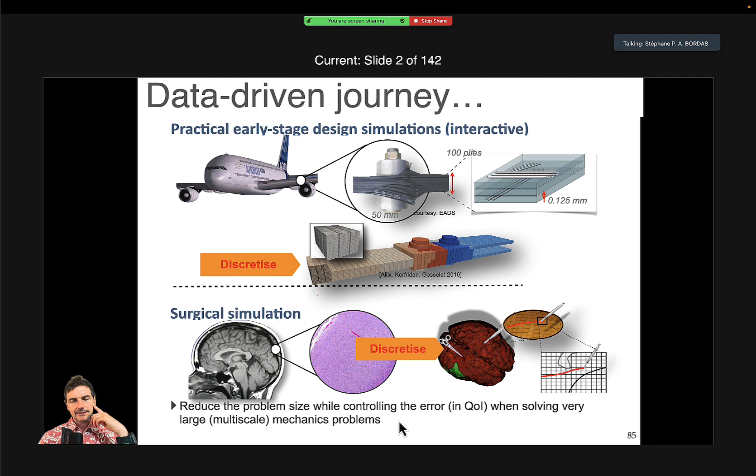I think it's very important not to be too shy and to try to take risks, especially early in your career. I could come back later to how to handle this in a practical way.

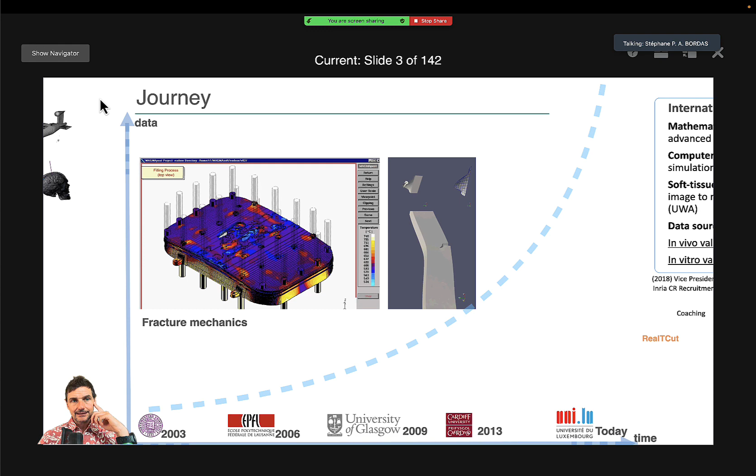So let's start with what happened during my PhD. I'd like to start from basics—it's always helpful to know where people come from. Here I've drawn a graph with time on the horizontal axis and data on the vertical axis, and this curve is an approximate representation of the amount of data versus time.

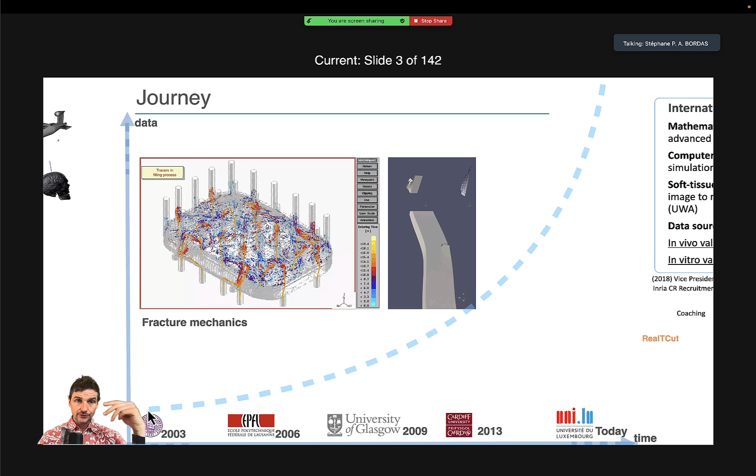At the beginning, during my PhD at Northwestern in 2003, we had to rely on models that were a priori written in stone. For example, we were working with Paris law, looking at the propagation of fractures in aerospace components made of aluminum. We looked at the literature, and of course Paris law is the most well-known approach to do that.

This is a semi-empirical law which essentially looks at observations and tries to decide what to do with them—what would be the rate of growth of the crack as a function of the number of cycles. This is exactly what you're interested in, because you'd like to know, between flight 1 and flight 10,000, how much the crack grew.

The vertical axis gives the speed at which cracks are growing, n is the number of cycles (flights), and dA is the increment in crack growth. On the x-axis you have the stress intensity factor, which you can compute using domain integrals—we can come back to that if you're interested. Basically what you do is compute the stress intensity factor; it's not easy, but conceptually simple.

And you then, based on the stress intensity factor, deduce the amount of crack growth, which is proportional to the number of cycles. So dA equals dN times delta K to some power. The power is again an empirical factor, and you have some sort of proportionality coefficient, which is again an empirical factor. So as you can see, you have a lot of data hidden in this Paris law, because people did thousands of experiments.

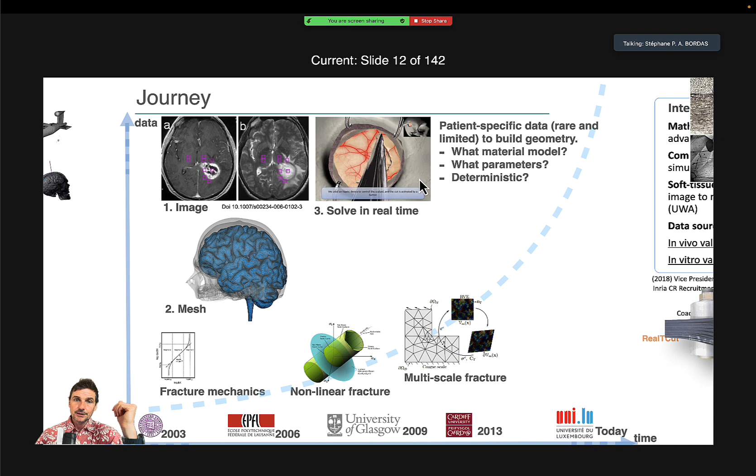This is where we went, because I remember clearly in 2006 when I wrote that first ERC grant, I said I will never look at constitutive models, I will never look at material models, because I don't want to know what the material is doing. This is not my field. There are experts like Ogden, Holzapfel and others, Gasser, who are really experts in modeling large deformations. I didn't want to work on that.

Recently, we completely changed this idea, because we realized that without working on the models, we would never be able to do anything patient-specific. So we said, okay, we will need to look at the models. Essentially, we went in the direction of Giuseppe Sciume, who pioneered work on porous material models for soft tissues. That was a big step in that direction, with Stéphane Urcun's PhD thesis.

So now the question is, what can we know about the material model? Because the big question is, as we said, all humans are different. So if they are different, how do we know what material model to use, and what material parameters to use? That was really the problem. Because we don't know that, we assumed a probability distribution for each of the important parameters. It's not very important to know which parameters at the moment—let's assume there are two, C1 and C2—and we have random fields.

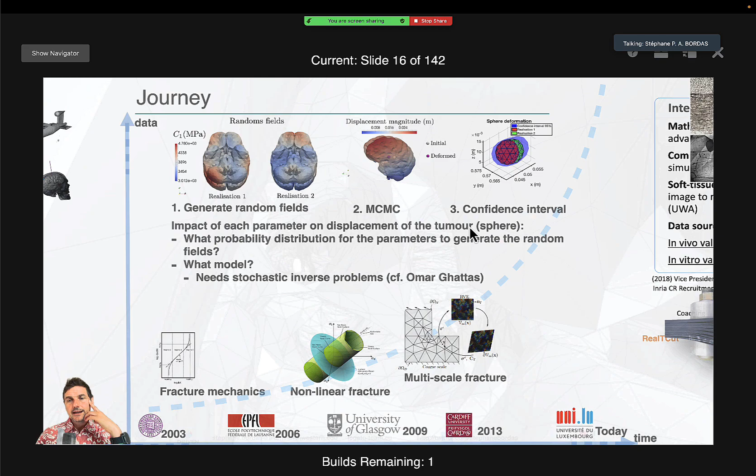The paper we submitted yesterday to PNAS is on unraveling the logic behind this microstructure, to know what were the characteristics of that microstructure that creates the energy absorption mechanism. I could present this paper at some other time if you're interested, it could easily take an hour because it's a very interesting problem.

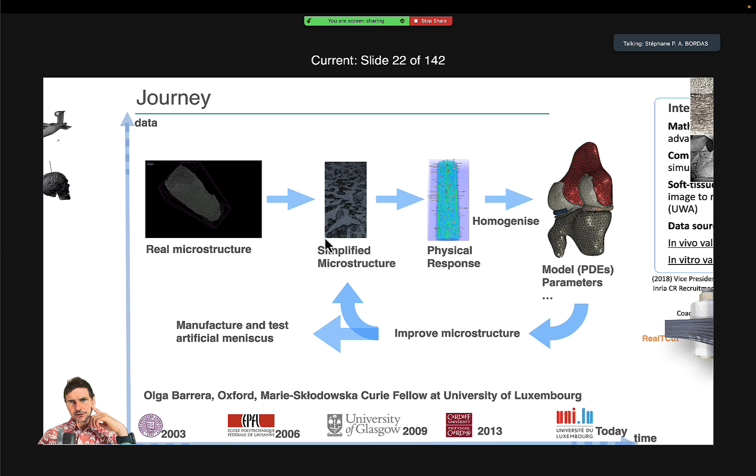And here comes the problem of data, of lacking data, because we, as you can imagine, do not have hundreds of samples of menisci. So we have one model. This is the model of the meniscus that we are working on. But it could be that at different points, the behavior is different, right?

So maybe here it's isotropic, here it's more in that direction, or here it's anisotropic in that direction, and so on. So depending where you are, you do not know for sure what the behavior is, because you don't have enough data on this particular meniscus. In fact, you have no data at all, because you never saw the meniscus before.

And so what you'd like to do is merge data from different menisci taken from different individuals, and then map this back to one specific model of the meniscus. I think that's quite a smart idea that we worked on, and it's working very well.

Okay, so then where are we going from there? We have now many projects that are essentially only data. So, I'm not talking about everything.

We have a very nice project with Jakub Lengiewicz and Alexandre Tkatchenko in physics on the quantum continuum coupling. We are looking at delamination using van der Waals interactions, proving that they are essential in figuring out the interactions between two layers of atoms, and that they see each other up to micrometers and not nanometers, as pairwise potentials would indicate. So if you're interested in this, we could also discuss it.

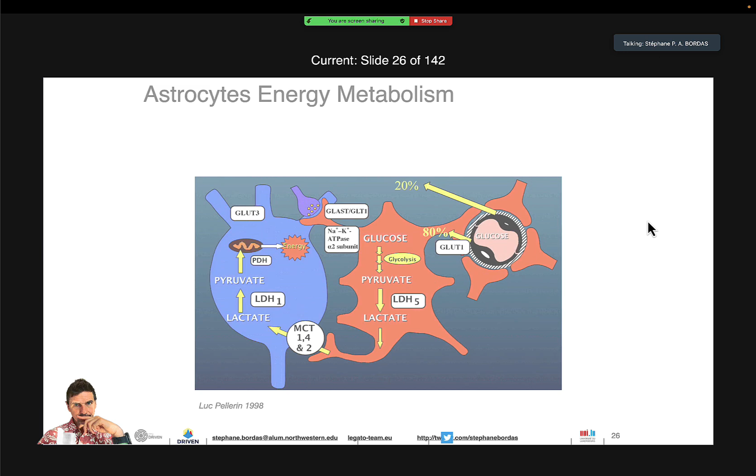Okay, so now that we've talked about the basics of where the data is, I want to give you a few hints about one particular example in the brain. This is something where we have data, but it's very difficult to access. This is data from an astrocyte in a mouse. An astrocyte is one of the glial cells around the neurons, and these cells are able to do a lot of things, which I'll come back to.

When you think about that, it's very difficult to model this. You would like to solve advection, diffusion, convection, reaction-diffusion in these astrocytes, but look at the complexity. We want to basically build a mesh of this - it's completely mind-boggling. So Sofia Farina came up with an approach using enriched finite elements, which I'll give more details about in a future lecture.

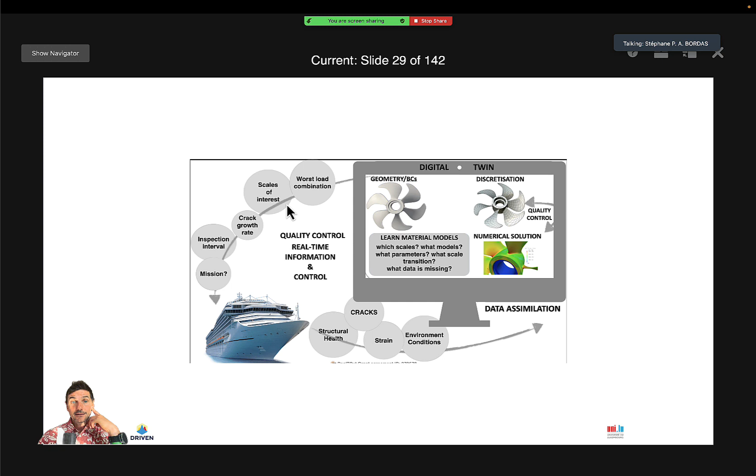Giving, for example, inspection interval. Should the ship go back to port? Should it keep sailing? What is the crack growth rate? What are the scales of interest? Because depending on loading, it could be that one scale is useful or the other scale is useful. What are the worst load combinations, and what are the best models that you can use to extract the parameters that you're interested in? So as you can see, there is a lot of information that can be gleaned.

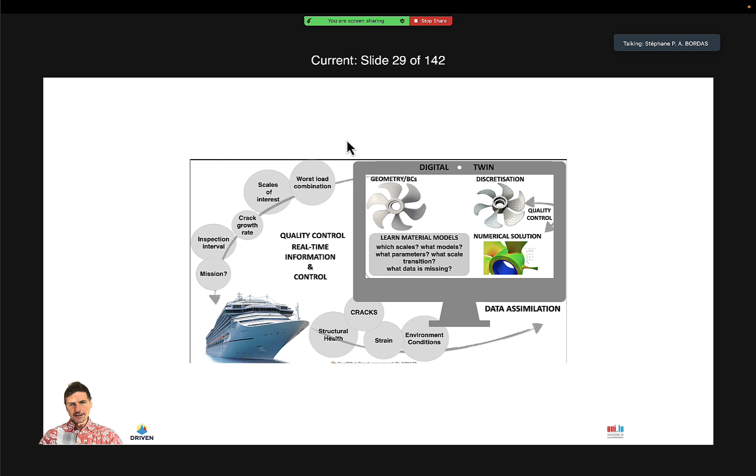And of course, there is no reason why we would not do that with actual human beings, because we do a lot of medical tests during our life. And it would be very helpful if we could actually use these medical tests and give informed information to maybe the medic, or maybe to have a virtual medic that would be actually able to make decisions and help you make better decisions on your health, on your food, on your sports activity, on your social connections, on what you eat, what you drink, and so on, and what your gut health is about, and your brain health, and your dopamine level, and so on. So you could basically imagine anything.

Of course, the devil is in the details, and there is a lot of work to be done for that to work. In particular, there is a problem of patient specificity, because all patients are different, but at the same time, you'd like to leverage information which is gathered through all the patients that you have. So you'd like to do some sort of updating of the information as you go. Okay, so that's basically where my whole group is going.

I will now summarize it briefly in a few slides, which I think are very nice in order to understand what's going on, what we are trying to do. So there are, first of all, quite a number of cases in computational science, and as I think I made the case for, traditionally we've been dealing with experiments done on samples that were gathered over tens of years, maybe hundreds of years, and tested. Now what's going on is a bit different, and this is what I want to show you here.

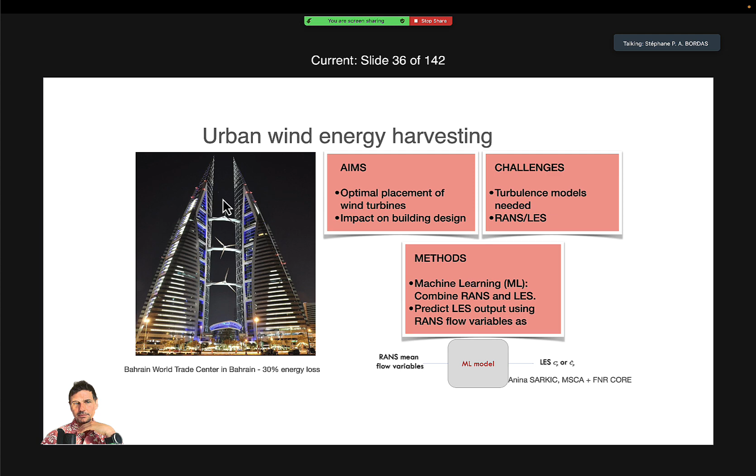A very simple example is urban wind energy harvesting. If you look at the Bahrain World Trade Center, they basically put 3 of these wind turbines there. The problem is it's wasting 30% of the power on a daily basis because of suboptimal positioning of the turbines. If they had put them in the other direction with the wind patterns, they would have made 30% more, apparently. I don't know this problem very well, but this is what it shows.

So it's a very nice direction. And the second one is trying to see what you can do with the usual methods.

Okay, that I will skip, but I will just tell you that this is something we could talk about at some point, very well known by Hussein Rappel, who would actually be a very good lecturer for that: essentially you're trying to update your knowledge about the world as you learn. I could give you an introduction on that as well if you're interested.

So you have prior knowledge about something, for example the parameters of the hyperelastic model of the brain, or the poromechanical model of the brain, or the meniscus. You have some prior knowledge, you say coefficient A1 looks like a statistical distribution like this. Then you have data coming in and other hypotheses that come in. Your idea then is to come up with a so-called posterior distribution.

So you have prior knowledge, you have data, they come into a Bayesian statistics module, and these hypotheses plus prior plus data give you an updated prior. This updated prior goes back to the prior knowledge and becomes the new prior. So now you have the feedback loop, and that gives you a new prior.

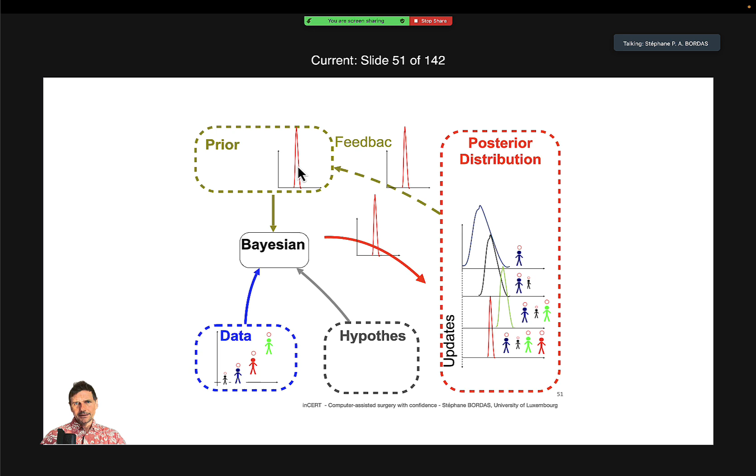And for model updating and model parameterization, this is a very powerful feature that you should know about. Okay, so well, this is basically what we just said.

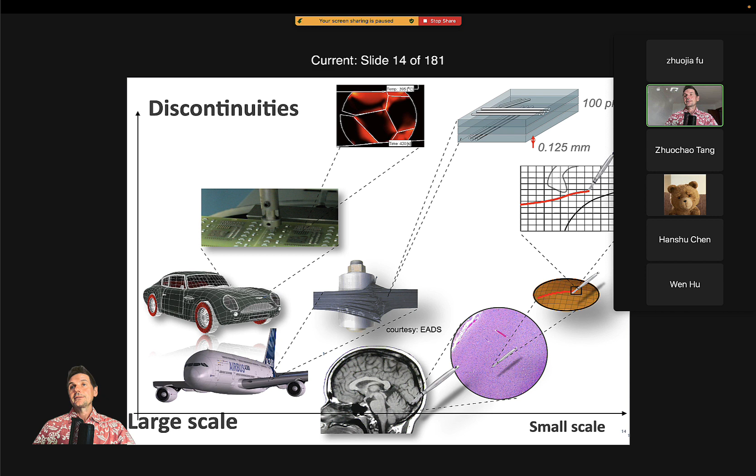Now if you cut through a brain tissue, you get a discontinuity which hopefully you don't need to mesh, because it's easier not to mesh - this is what we call free boundary problems. Again, going from legato, where you sing all the notes in a linked, smooth way, to staccato, at the small scale it sounds a bit like this, with little jumps and discontinuities between the words. That's a different way to see things.

So what we do basically - this is a very nice concerto which I really like, by Brahms - if you think about what we are doing, we are orchestrating the sound of materials. If you go lower, you see staccato; if you go higher, you see a very smooth thing. So if you listen to the material at the coarse scale, you hear something very smooth, but at the fine scale you hear very disrupted sounds with many jumps.

There are many examples: multi-phase problems, fracture of concrete, the problem of multiple bubbles being created, non-Newtonian fluids, and a dam break example. So lots and lots of different examples.

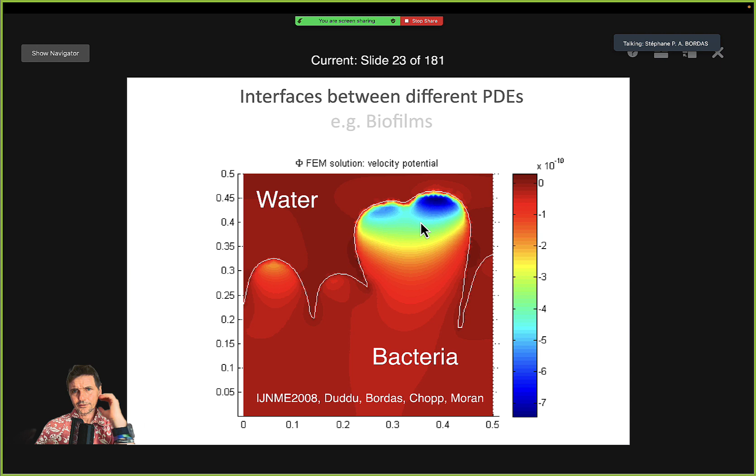And we have a weak discontinuity. Another example: the key point here is to figure out the growth of this biofilm. On the interface, you have a velocity potential with a gradient, and this gradient pushes the material outwards - this is the bacteria growing and pushing outward. Outside, in the water phase, we have a Laplace equation, and we have a Poisson equation in the bacteria phase.

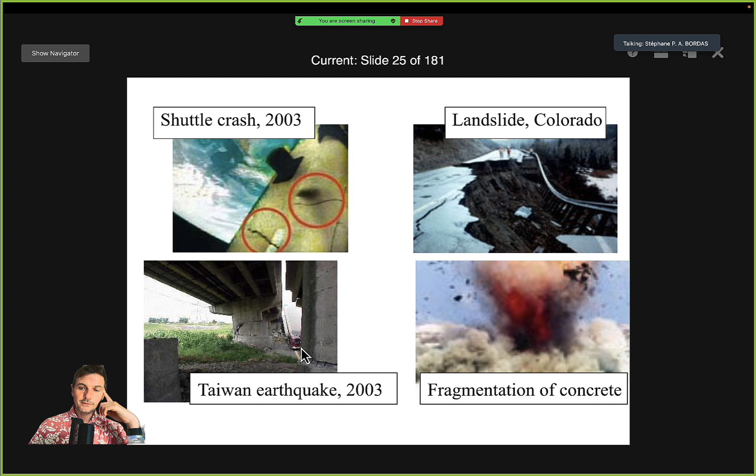So now the problem is, when do free boundary problems occur? Of course, fracture mechanics - Taiwan earthquake, fragmentation of concrete, landslides in Colorado, lots of examples of fracture, like the Comet aircraft, which became a convertible aircraft, but that was not foreseen. Problems of fracture in biomechanics, and so on. Fracture is really everywhere, and what I show today are simple examples of free boundary problems.

And of course the work of Xuan Peng, who did his PhD with me, and Elena Atroshchenko on propagation of cracks using isogeometric analysis with boundary elements, which is one of the best work that we've ever done, I think.

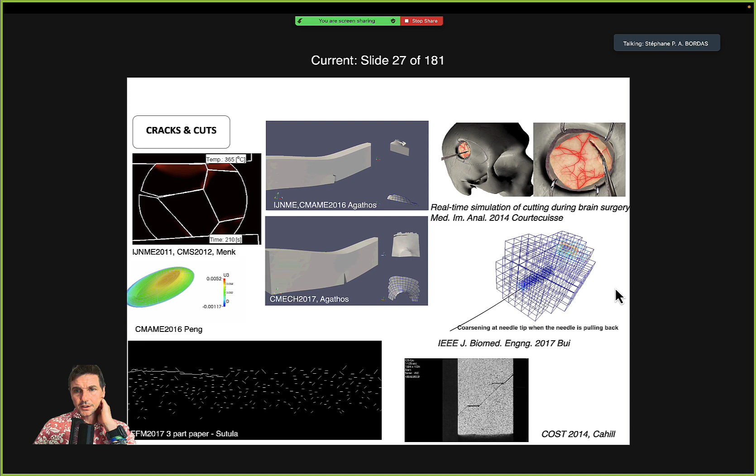Okay, so now, first example: cracks propagating inside a domain. You would like to figure out what exactly is going to happen, what is the most energetically favorable growth of crack that we can do in one increment. So you do a global minimization on all the crack tips, and try to compute which crack should grow. As you can see, it starts here, but then at some point, the most optimal crack is not here anymore - it starts to grow next to it, and so on.

It's a very complex problem to solve, and Dennis did that in very simple MATLAB code - well, not so simple, but very beautiful work that he did. Again, cutting in soft tissue that I've already talked about today.

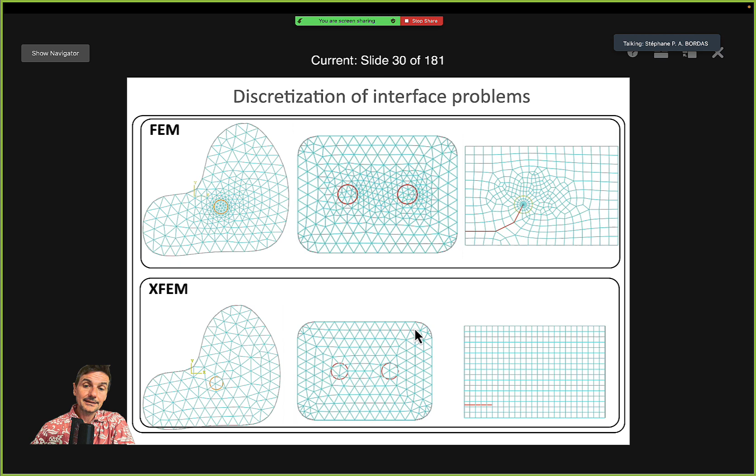That's why people came up with partition of unity methods. The book that we will release in October with Sundar at IIT Madras - what we see there is that the mesh is independent from the growth of the interfaces, because we can include discontinuities and singularities in the approximation field. That's been quite a big advance in the last century. So now there are really two approaches to handle interfaces.

The first approach is a coupled approach. What you want to do is couple the mesh with the geometry - that's step 1. The second approach is the opposite: decouple the mesh from the geometry. It's interesting because at the end of the day, these seem like two opposite approaches to solve the same types of problems. Practically, you might want to keep the same representation for the geometry and for the simulation, which would be something like isogeometric analysis.

On the other side, you want to decouple, so you have a mesh which is independent from the geometry. These two approaches seem totally opposite. So what we're going to try to address today is: what are the better approaches? Of course there's no general answer to that question, because if there was, there would be no research.

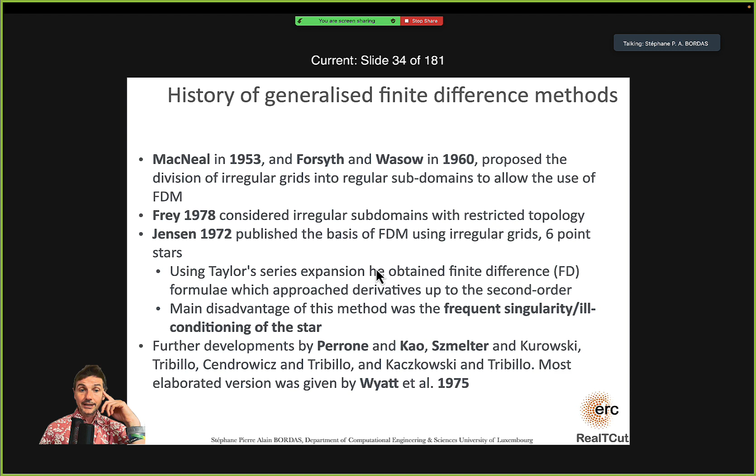You want to approximate the operator, different from finite elements where you approximate the unknown field - quite a different idea. In one case, finite differences, you approximate the operator; in the other, you approximate the unknown field. Very different problem, but at the end of the day it boils down to the same solution in one dimension - you get the same equations, but the approaches are totally opposite to each other originally.

The idea is how we can easily imagine calculating a derivative by looking right, looking left, taking the difference, and dividing by the length of the interval - that would be an approximation of the derivative. This is possible, but now imagine you're in 2 dimensions and the points are totally irregularly placed, maybe using a finite element mesh. Then how do you do it? This is called generalized finite differences, and there are papers that work on this. The question is how do you compute the operators - that's what we'll see in a few slides.

Now why really use strong form methods? Because these types of methods are known as strong form - you immediately and directly write the partial differential equation you're interested in at all the points in the domain you want to solve. So you say, I have Laplacian plus b equals 0 here. I compute the Laplacian locally, it gives me an operator, I put that on a row of the matrix. I compute b of u, put that on the right-hand side, and that gives me the operator I need. That's it - quite straightforward in general, at least for linear problems.

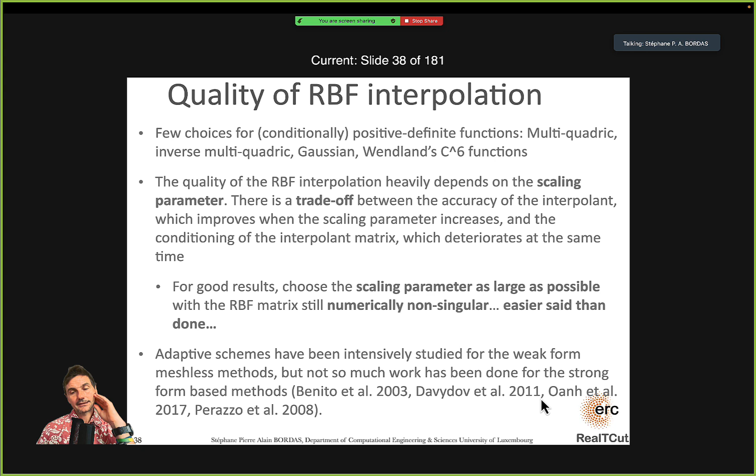And I highly recommend that you read the papers by Davydov, D-A-V-Y-D-O-V, because he is one of the world leaders in that area. And recently with Pratik Suchde from my team, they wrote a review paper on how to place the centers of collocation methods in general and how to optimize the point placement. And this review, I think, is outstanding, so I highly recommend it, as well as the work of my PhD student that I will show you later.

Okay, so what are collocation nodes? So we have collocation nodes are here. So, okay, that's one point, XC. You have a radius, RC, and you have a field point, XP, that are also known as particles. And the support is this area, or the volume, over which the point XC has an influence.

And so the question is, okay, what would you like to do? Well, you want to compute the derivatives at XC, which can allow you to reproduce the field values at each particle pi of the collocation node support. Okay, so basically you want to compute all the field derivatives here, which allow you to compute the values at points pi.

So what is a finite difference method? Well, that's what we said before. All we do is we write at xp, at any point, right, that is here, we write the value as the value at xc plus some corrections that come from Taylor series expansion. What else can we do?

I mean, it's the very logical thing to do. If you assume the solution is smooth, very important point, then you can do that very easily, and there will be some convergence radius of the Taylor series expansion and so on. So you know that you will eventually converge if the solution is smooth, and only if it's smooth.

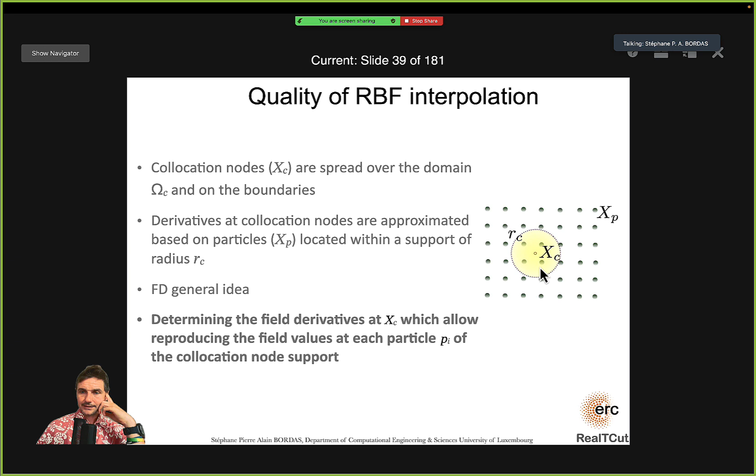Now what we can do is for a support composed of 5 particles, so remember what the particles are, they are here, so let's say 1, 2, 3, 4, 5. We have 5 particles in the support. We can write 5 equations.

XC, C is the center, it's the collocation point that you're interested in, so you just write the Taylor series expansion for each and every derivative that you're interested in. So then if you do that, you write this times this, plus that times that, plus this times that, and so on, will be equal to f of x p1 minus f of xc.

So what you essentially do is for each of the points, p1, p2, p3, p4, p5, you write the Taylor series expansion, which gives you f of x p1 equals f of xc plus the corrections due to the derivatives, and you do likewise for all the other points.

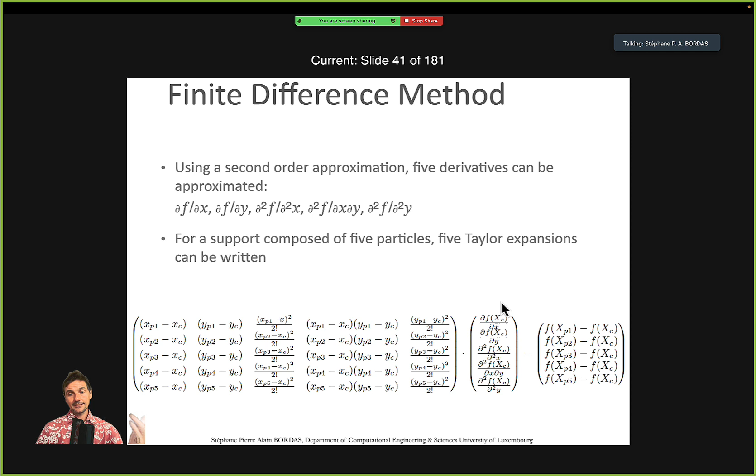So now you can see that if you have 5 particles, you can write 5 Taylor series expansions, and therefore you can hope to find 5 values for these derivatives, because that's what you're looking for. After all, what your question is here is what is the derivative of function f at point xc, with respect to x, then with respect to y, with respect to x twice, and then x and y, and y twice. And so that way you have an approximation of this.

So this is what you do. You put that in matrix form. You invert the matrix. You hope that it's invertible. Of course, that would be hopeful. And that's what you get.

So now the problem is that in the previous case we had exactly 5 derivatives and exactly 5 points, but that will never happen. Usually you will have cases where you either have too few points, in which case you can't do anything, or too many points, in which case you can do something, but the system is overdetermined. And of course you cannot solve it exactly, but you can solve it in the least squares sense, which essentially boils down to doing it this way.

So now what you do is you have a least squares functional that you're writing, and you try to minimize that with respect to the parameters. Okay, so far so good. That's the very usual way of doing things.

Now there is a second approach which is maybe unfortunately not very well known, known as the discretization corrected particle strength exchange. I have to say that the first time I heard this, I thought that was a mouthful, because it's quite complex to even read, needless to say, to understand, but there is a lot in that method, and I will try to tell you a bit about it, because I'm almost sure that you probably didn't hear about it. And if you like, I can also give you the papers, because I think they are quite useful.

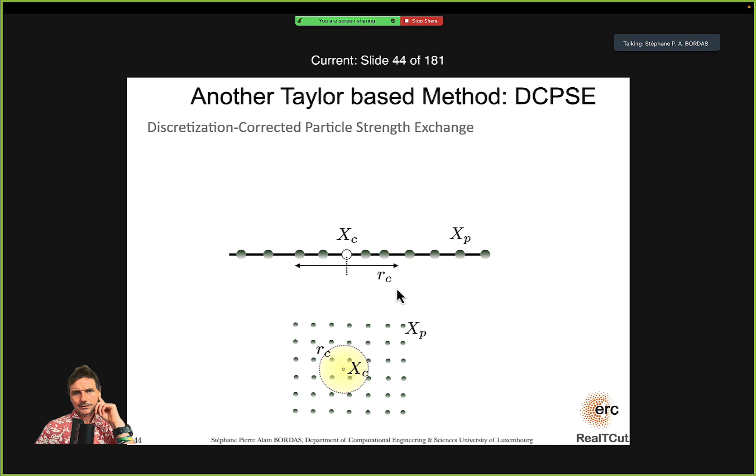So let me start from the beginning. So what we do here is exactly the same as before. So we try to identify the value of the derivatives at a point xc. So it would be like that one.

We try to get the fh, the x. We try to get, of course, the value of the function, the first derivative with respect to x, with respect to y, partial x partial x, partial x partial y, and partial y partial y.

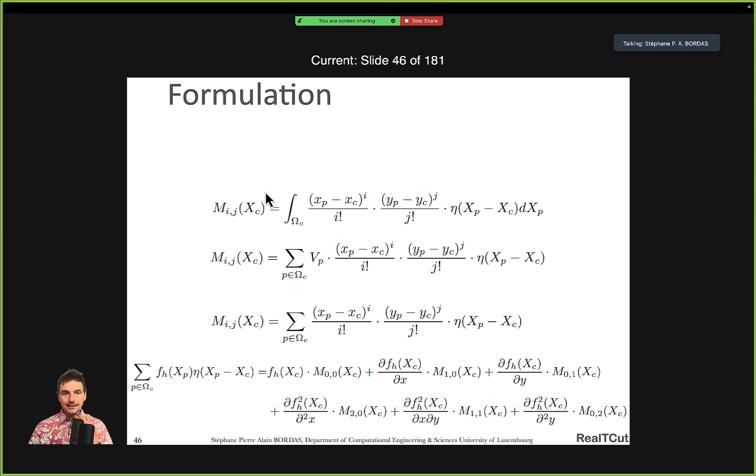Okay, so now what we do is we write it as some sort of integral, instead of writing it as a simple sum. So then we end up with some sort of moment matrix, Mij, and that moment matrix we use directly in order to identify or compute the coefficients that we need. So basically we did exactly the same as before, except that we are now correcting with an integral value. So this is the basic idea.

And on that topic, I recommend that you look at the work of Ivo Sbalzarini at Max Planck Institute in Dresden, because he is one of the world leaders in that area. He came up with the idea with his PhD supervisor, and he's really an excellent guy.

Okay, so once we have selected the appropriate function, because basically we have a smoothing function, which is this kernel here, we can apply the desired derivative, and we just set all the moments to 0 except the one that we are interested in, which we set to 1, and we do that alternatively.

So first we set the first moment to 1 and the others to 0, and then we set the first to 0, the second to 1, and all the others to 0, and so on. And that gives us essentially a set of equations which we can solve.

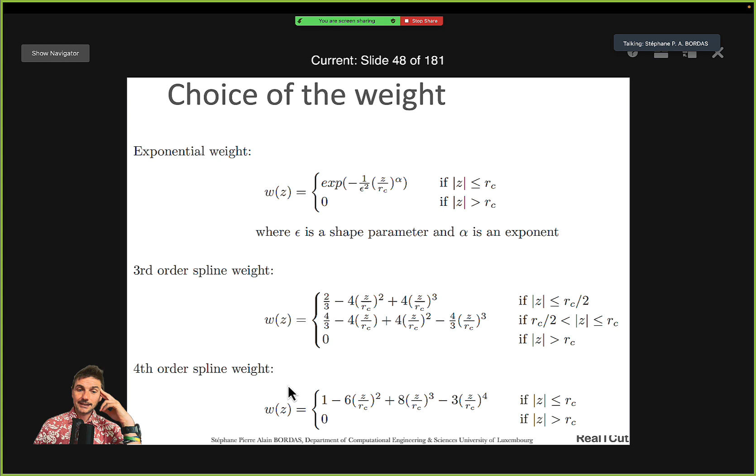But first we need to have a weight. So again, like in mesh-free methods, we have exponential weights, third-order spline weights, or fourth-order spline weights. We can use different things, and of course they all have their own advantages and drawbacks, which I identified in the papers as well.

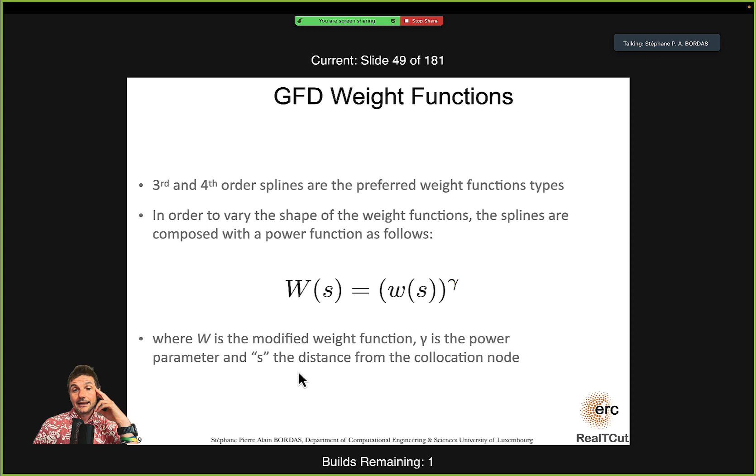Now we are going to look at a few problems using this discretization-corrected particle strength exchange. What we have managed to do is to have an adaptive point collocation method. This adaptivity allows us to optimize the point placement based on an error indicator, similar to what I was telling you about the surgical simulator, where we were trying to identify the best mesh for the system. We would like to have the optimal point distribution in that case. I'm really encouraging you to look at the papers I will give you, because they will allow you to understand better the way we do it practically.

The first thing we remark by solving the problem - here we're solving a very simple linear elastic problem with internal pressure in a sphere - we're computing the stresses, and we're doing that on a code which is parallel, and that's also available if you're interested.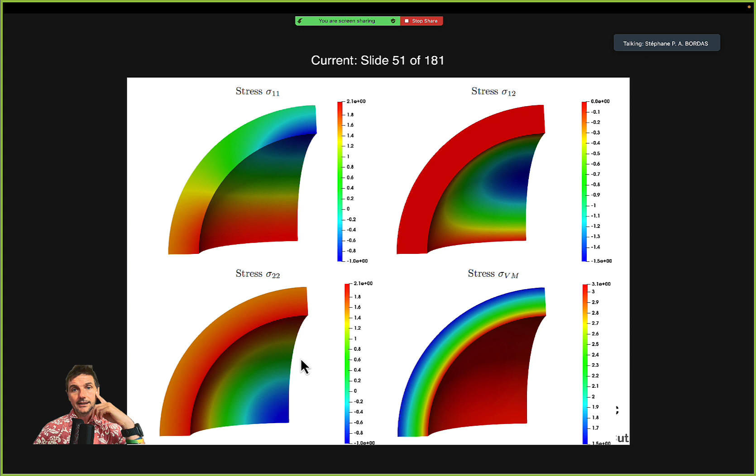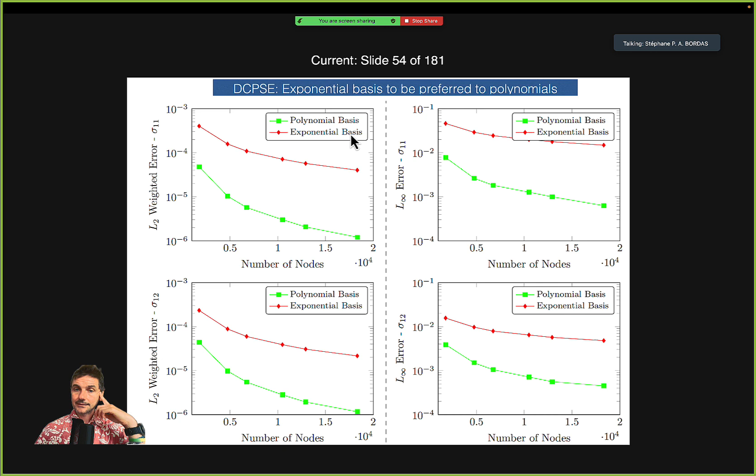Again, if we compare polynomial basis to exponential basis, what we see is that we have much better results with the polynomial basis, up to one order of magnitude less, even two orders of magnitude less error, which is great. So it's basically the opposite - polynomial basis better than the exponential basis. We still don't know why, but that's what we see.

Now, if we look at the support size on the boundary, because this is a very important question - what happens close to the boundary? In mesh-free methods in general, a lot of people are avoiding the problem. But even in Galerkin mesh methods, you have this support that intersects the boundary, and when that happens, you lose the Kronecker delta property on the boundary, because you basically do not have a zero test function on the boundary anymore. So this is something that we need to take into account.

Okay, so now what can we do with that? Let's look both at the Voronoi diagram GFD, generalized finite differences, where the points are distributed using a Voronoi diagram, which is a very well-known approach, dual to Delaunay triangulation, tessellation.

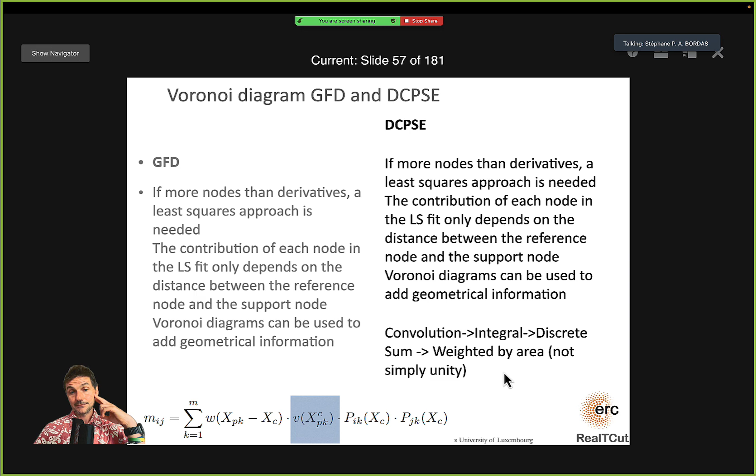If you have more nodes than derivatives, you need a least squares approach, and the contribution of each node in the fit only depends on the distance between the reference node and the support node. The Voronoi diagram can be used to add geometrical information. In DCPSE, if more nodes than derivatives, there is also a least squares approach, and the contribution of each node in the LS fit only depends on the distance between the reference node and the support node, and the Voronoi diagram can be used. But we use a convolution, an integral, discrete sum, weighted by area, and not simply unity. So this is what DCPSE changes.

Let's look at how it looks. This is a Voronoi diagram, reference node and support node. So if we use a Voronoi weight as opposed to a simple weight, we see that there is almost no difference.

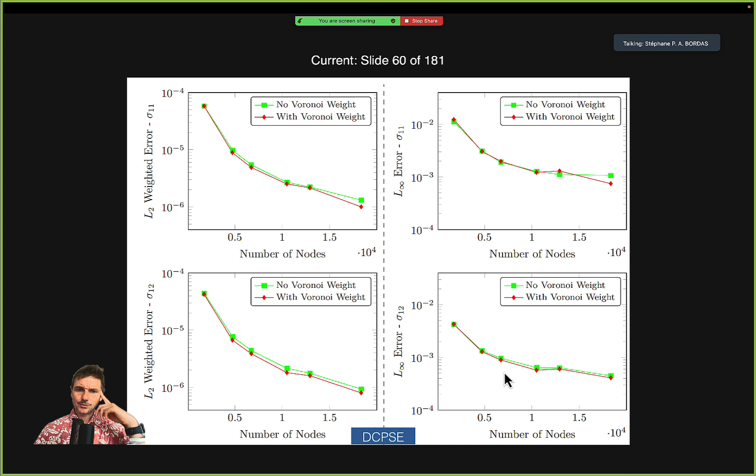So this is reassuring, which means that there is probably no need to be doing these changes. Okay, and now those are the results with mesh convergence, which is a hard topic because there is no proof of convergence for such methods, so we can only hope to get things as beautiful as finite elements.

Let's look at efficiency. So we have different methods here, and we try to look at the convergence rate in terms of the L2 weighted average. And the convergence rate actually is not that bad, because it's actually close to what we would expect in finite elements, which would be 2.

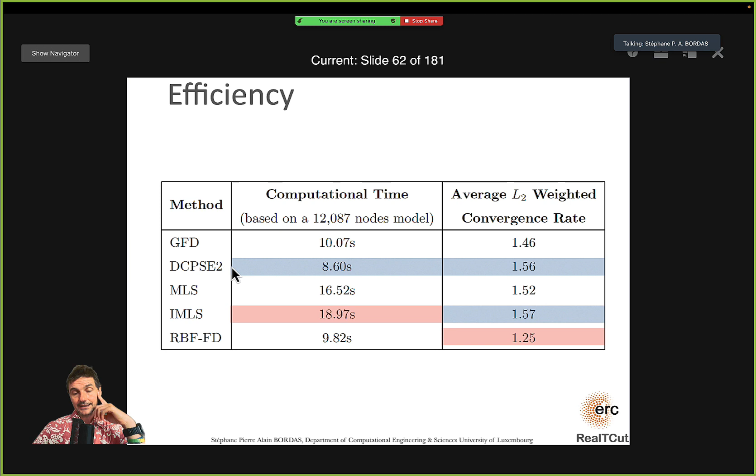Here, for that problem at least, you see that in terms of the time to compute, there are different methods that we tested: interpolation, MLS, RBF, FD, DCPSE2, and GFD. What we see is that clearly the convergence rate that we get, which is one of the best, is DCPSE2, and we get a computational time which is significantly less than IMLS, which is actually half. It's better than generalized finite differences, so clearly it seems like DCPSE is the method to choose.

So let's look at some conclusions. First of all, we need a sufficiently large support, but also not too large a support, because otherwise we end up with a huge bandwidth, and this is not stable. This is also time consuming in terms of memory. What we see is that we need 11 to 15 nodes for 2D problems and 37 to 45 nodes for 3D cases. We need a large number of nodes to get a proper simulation.

Okay, and what does it mean in practice? So if we look at this flange here, we assume there is uniform pressure loading here, displacement constraints there, here, and there. Now the question is, what is the deformation of this? Again, we started directly from a CAD file, so from NURBS.

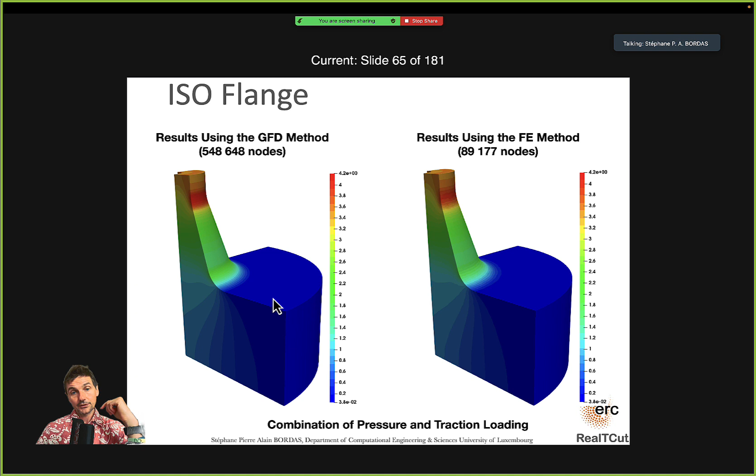This was discretized using three approaches. One was an STL file, which is basically a triangulation of the surface, and the other was simply putting collocation points along the splines, using the splines directly without any mesh. I think that's also very nice. The third was to embed the whole flange into a regular lattice of points, so that we don't even need to know where the points are. We just then add the points on the boundary as needed. I will talk about it a bit later.

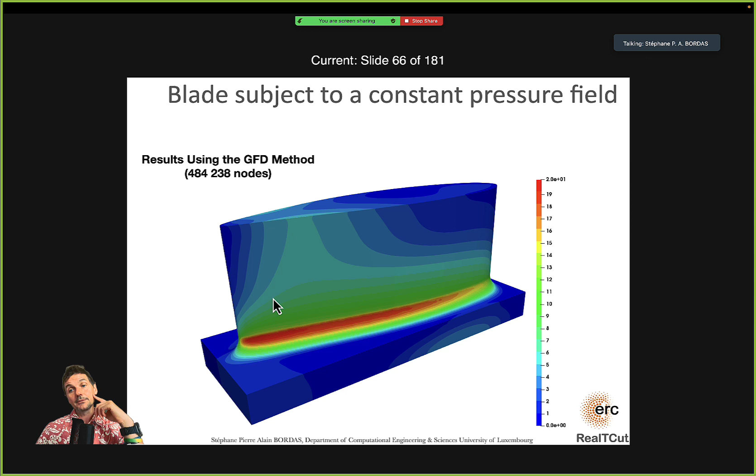Okay, so now we look at the results using generalized finite differences, and they look like that, with a very nice stress concentration. And now I'm telling you what we are working on, although now most of the results are in the recently published papers that I was mentioning.

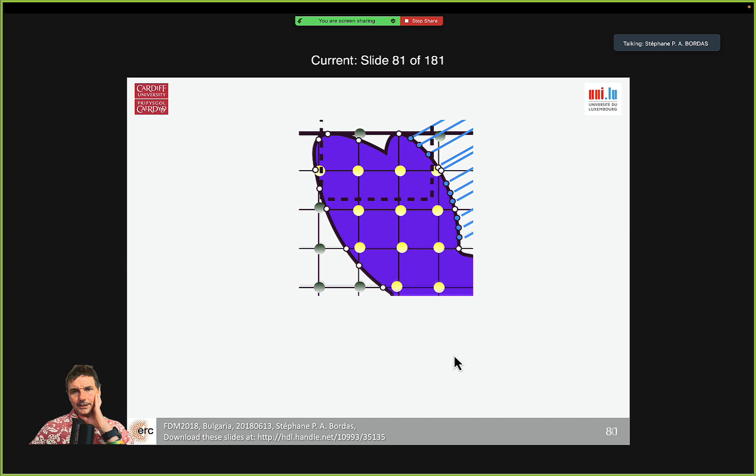So what you, of course, can do in these problematic regions is zoom in. Once you have zoomed in that region, you will simply add points at the interfaces, at the intersection between the geometry and the mesh. That's it, basically. Then that will allow you to have a better description of the boundary. And we do that in a semi-automatic way, let's say. Same here, we will have to add some points which will allow us to take care of the boundary.

Now, of course, we are not able to handle a kink, because that will create stress concentrations, and we can expect that we need some more points here. And again, the paper by Pratik Suchde and Oleg Davydov is talking about this very nicely.

There are some references, in particular from Davydov and Oanh and others, that are very useful, and some by Benito on how to compute DCPSE. I can give you those references as well as the presentations if you're interested. I think it's worthwhile reading this, in particular the paper with Oanh and Davydov, because that will give you quite a number of ideas.

So what we do is, from an STL file, we embed the STL file inside the domain. We cut everything that's outside, and we look at the convergence. We look at energy, Cartesian, symmetric, and so on, all the different convergence rates, and essentially the result is that the convergence is in the L2 norm of slope 1.

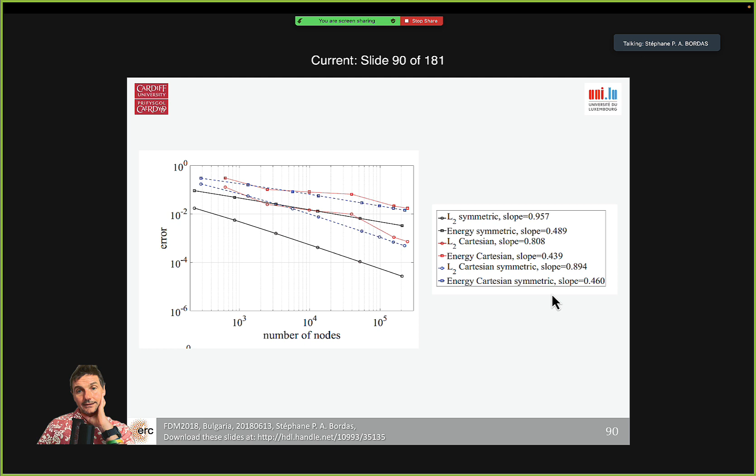You would expect 2 in the L2 norm, and you get 1. As you would expect 2 in finite elements, here you get 1. This is something you need to take into account. Again, if we use different approaches, we see the convergence rate on that curve.

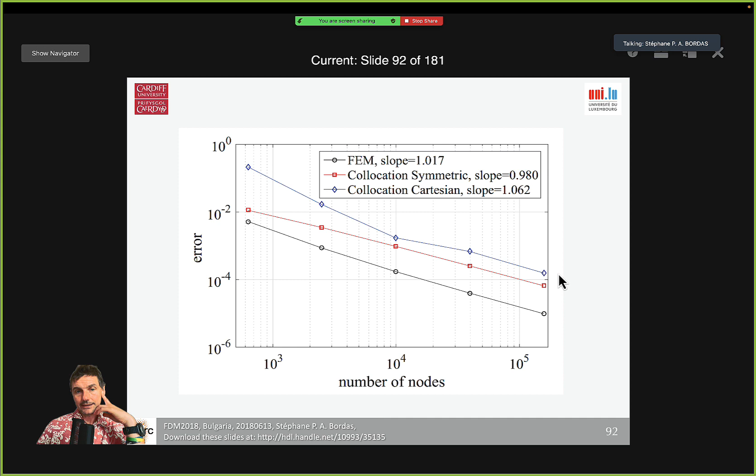In terms of number of nodes, we can compete with finite elements. You see finite elements here, collocation here. In fact, the slope is a bit smaller, but not much. And for the Cartesian case, we get a higher error, but the slope is approximately the same too.

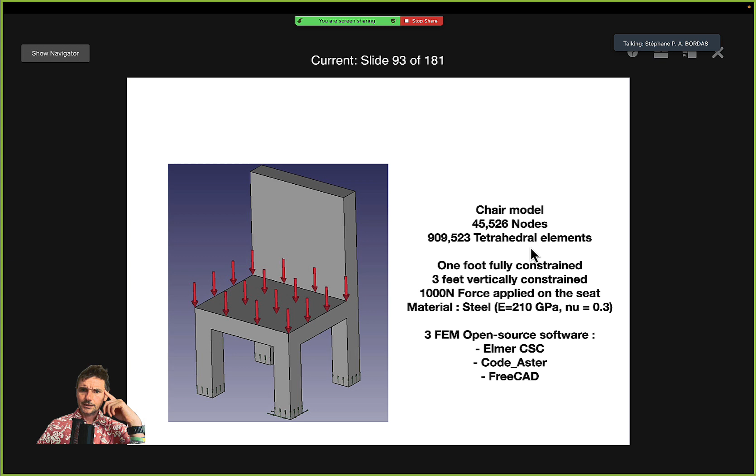Then we dealt with these very nice problems of a chair. Again, this is done with open source codes like Elmer, Code_Aster, and FreeCAD. We have different materials here, different nodes and tetrahedral elements and so on. So it looks like that. You have about 1 million elements.

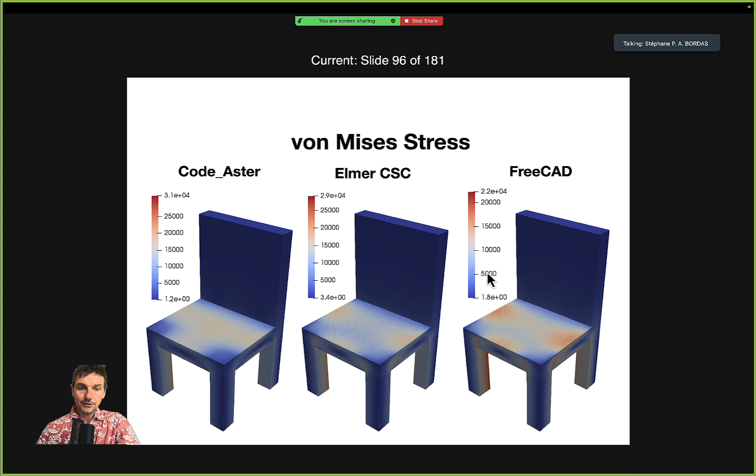And we are comparing all three solutions between what we're doing and the different solutions. If you look at the cut view of the distribution on the seat, you see there is barely any difference. If you compute the von Mises stresses, you see there is quite a good distribution. And finally you see this.

I think adaptivity—in fact I will show you the paper later if you're interested—but essentially adaptivity will allow you to optimize the mesh and the point placement given an error level. And again, here we always assume that we do know that the problem we are solving is the right problem.

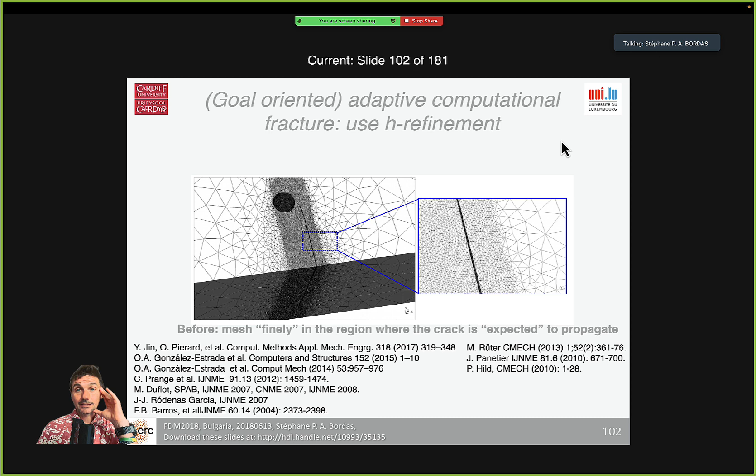We're not asking the question, is it the right problem? We're just saying, this is the right problem. Are we solving it right? Are we solving it precisely enough? That's really our main challenge. So how do we deal with error estimation?

I will come back to that at some other time this week. I just want to tell you for now that we have worked on this with a research center called Cenaero, and they have implemented it in their commercial version for 3D fracture mechanics. You see how a crack can propagate, and it's actually decimating the number of points, so we have far fewer points for the same error.

Because what we were interested in here was to minimize the error on the stress intensity factors. The stress intensity factor is, if you remember from Paris law, the governing point with which you are solving the propagation of cracks. So if the stress intensity factor is inaccurate, then what you get is an inaccurate propagation growth. It's very important to have proper stress intensity factors.

So now, how do we deal with that? If you look at the number of elements close to the crack front, you see that it's quite dense, and you would not like to have such a dense mesh everywhere, because that would be totally unfeasible. So that's what we did.

Similar for surgical simulation—you want to insert a needle in a brain, or in a liver, wherever. You have localization here clearly. You have high stresses, shear stresses and shear strains until the needle penetrates the organ and reaches the target.

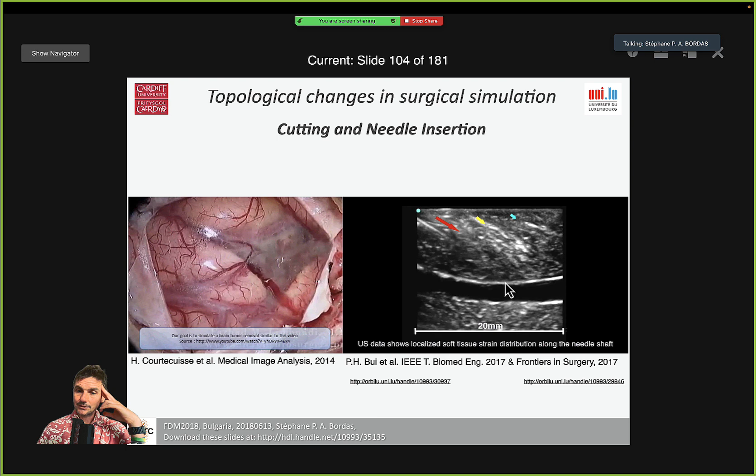So what we did is we developed a real-time error estimate, able to compute in real time the approximation error, meaning the ability of the numerical simulation to capture the exact solution, which we don't know. This is a bit of a mathematical miracle: without knowing the exact solution, we're still able to give an approximation of what the error is. This is something quite amazing.

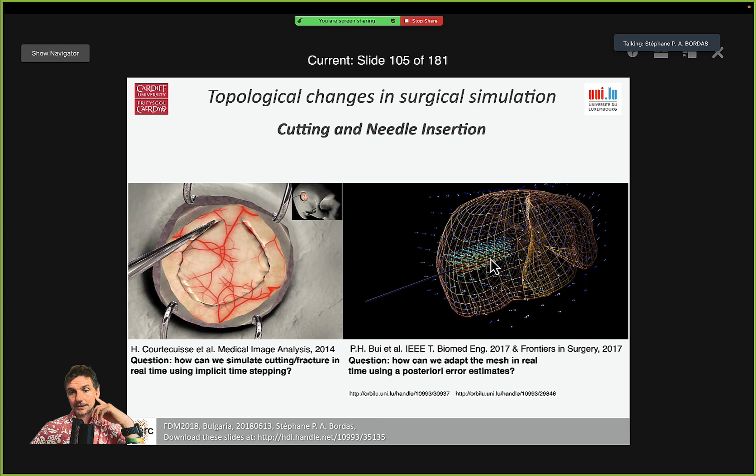So we insert the needle in this virtual liver. This is work by Bui-Phuoc. You see the needle is inserted, the mesh is refined, and as we retract the needle, the mesh is then unrefined, because the stresses are not varying that much anymore.

So we insert the needle, puncture, and the elements are refined along the needle path according to an error estimate. It is not random refinement, as you can see also here with the boundary conditions. There is some local refinement because of error levels. Then we retract the needle and the mesh comes back to its original

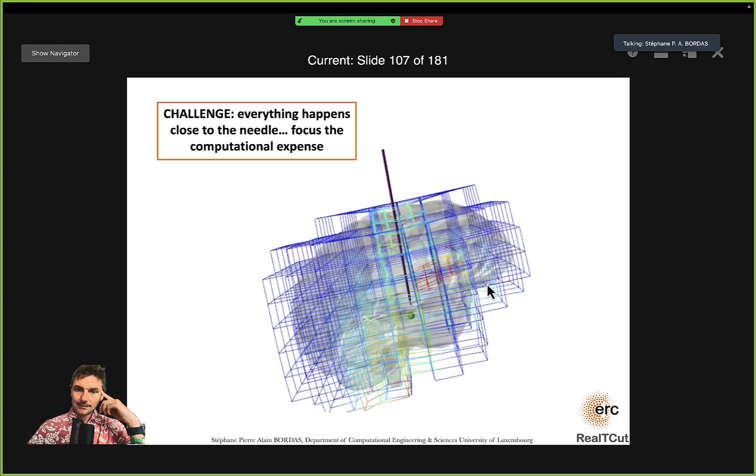density. Okay, so that's how it looks if you insert in a brain the cannula, which is used to insert an electrode and reach a target to stimulate with an electric current pulse the target for Parkinson's, let's say, not treatment, but alleviation of difficulties.

And so yeah, that's it. And now I will show you the list of papers that we published on that topic so that you can

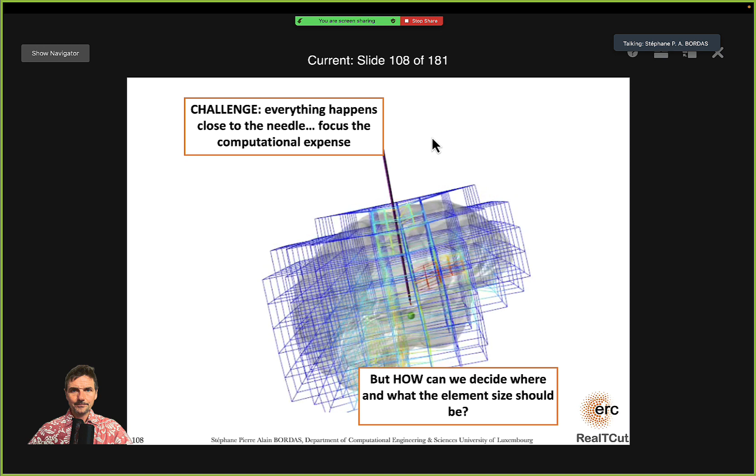take a better look. And I think I will end with some basics about the material point method, because I think it would be more suitable. And then in the coming days, I will be able to tell you more about the topics that we talked about today, which are, in my opinion, quite important. And of course, in the meantime, feel free to tell me what you would like to talk about, and I will do my best to make it happen.

Okay, so this work is mainly mesh-free work. I've introduced you a bit about mesh-free methods. We have talked mainly about point collocation methods, but you can also think about mesh-free methods as Galerkin methods. I think one of the very well-explained topics in that area is by Atluri, who unfortunately passed away. But we have basically the MLPG method, so Meshless Local Petrov-Galerkin. MLPG is a really nice way to think about all mesh-free methods. And if you like, I can also give you a categorization of all these methods, because they can all be formulated within one overarching framework.

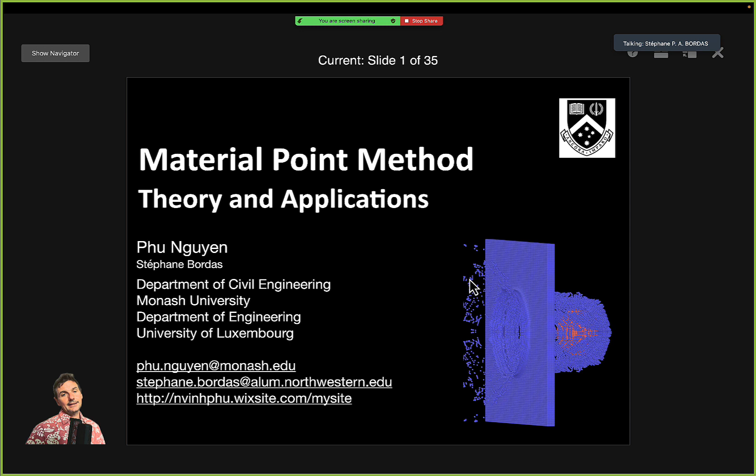So the material point method, this is work done mainly by Nguyen Vinh Phu, who is at Monash University. We wrote together this book on the material point method with Alban de Vaucorbeil, a colleague of Phu. I just want to motivate a bit what these methods are able to do, because what's really quite interesting is that they are quite related to what we used for the meniscus problem that I showed you earlier today.

So Alban is the guy that I was telling you about, who worked with Phu. He's at Deakin University, which is in Melbourne. And Tushar Mandal, who was a PhD candidate with Phu. This was funded by the Australian government and the Australian Research Council for Phu.

Okay, so what you see here is deformation, fracture of solids. So this is a totally different type of problem than what we've talked about until now, in the sense that you have very large deformations and fragmentation. So it's not really a problem—large deformation is usually quite tractable, but certain problems are

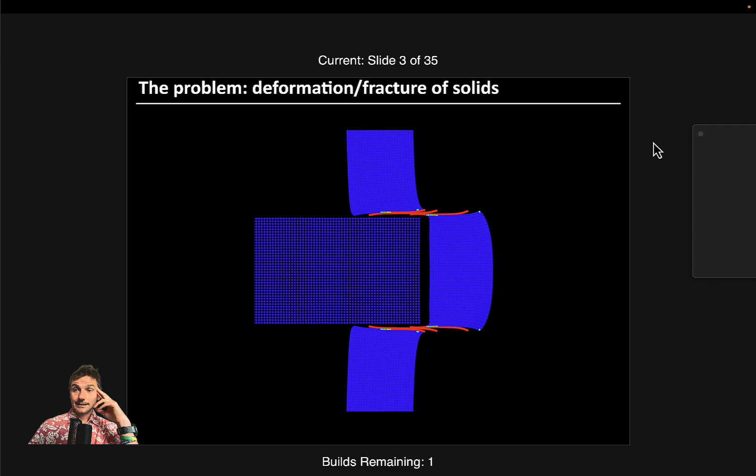Okay, certain problems with fragmentation are much more tedious to address than problems related to large deformations, because fragmentation means that you have several subcomponents of the solid, and this is something which can cause quite a lot of issues.

Okay, so for example, if you imagine this cube that enters this other cube, this is, for example, a bullet entering a domain or a piece of armor, then you can see that this region is extremely stiff and that one here is much more soft. And the question is, what would be the number of fragments that you end up with? What would be the energy absorbed? Or what would be the velocity of the outgoing component? So that piece that is being thrown out. And that's important for obvious reasons in terms of engineering.

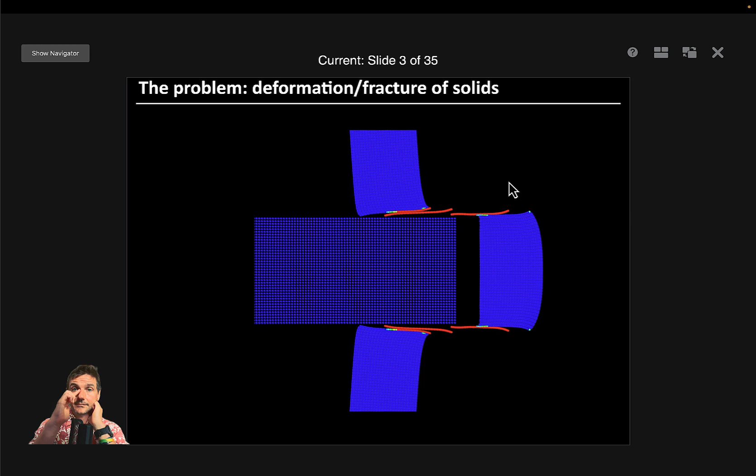And so if you were to solve that using finite elements, the problem would be really quite intractable. And I'm saying this because the idea of mesh-free methods dates back to Monaghan. So I hope you still hear me because there were some issues. So the problem of mesh-free methods clearly dates back to Monaghan, 1975-76, and originally that was really the SPH method.

So if you look historically, you start from smoothed particle hydrodynamics, which was written in a quite simple way at the time. Then mathematicians and engineers figured out that there was some instability to this method, tensile instability, and they tried to address it, and many versions of SPH were produced. Okay, so I think that's essentially the main point.

And after that, there were some different types of mesh-free methods that came about. And I could give you an overview at some point about the history. It's also given very clearly in our Partition of Unity book that will come out in October with Sundar. But if you are interested, I can give you a very quick overview. Essentially what happens is that in 1994, just at the same time as the Partition of Unity comes about with Melenk and Babuška, who unfortunately also passed away recently.

With Melenk and Babuška, we get this idea of partition of unity, which I will define in detail in a forthcoming course. But the thing is, with the new mesh-free methods of the time, they try to address problems related to smoothness of the solution.

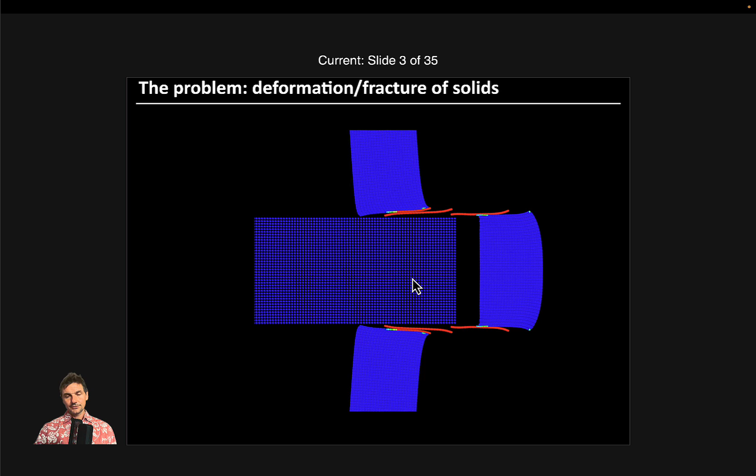So basically that's the idea of what you want to do with MPM. MPM is some version of SPH, which is much more flexible because it both relies on a mesh and on a set of particles.

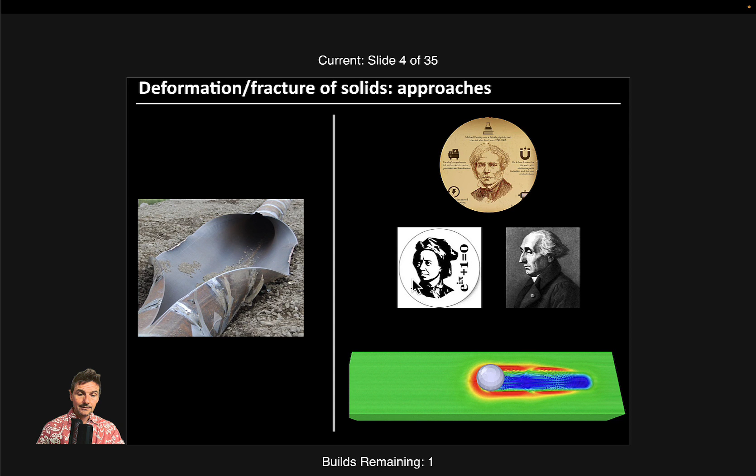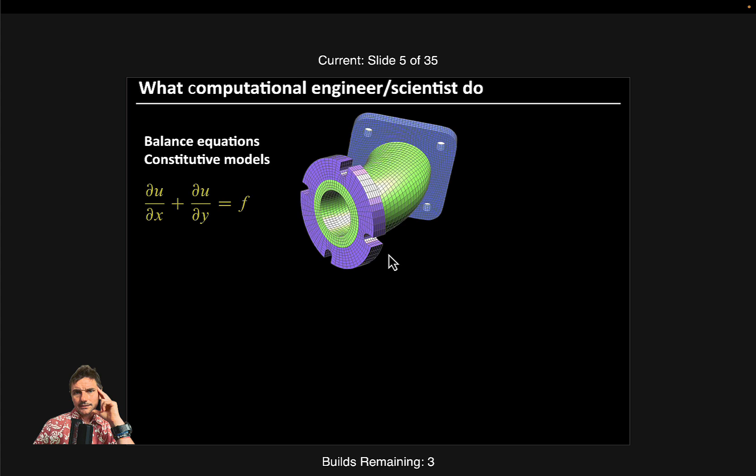So what do we typically do? Well, we typically write the balance equations - constitutive models, kinetics, and so on. And we have some geometry, so in that case, this little tube that probably connects to valves. Then we get some equations for that. Very simply, we code it in a computer, like finite differences or whatever we solve, and then we get a result - in that case, fragmentation of a piece of something with a bullet or something similar.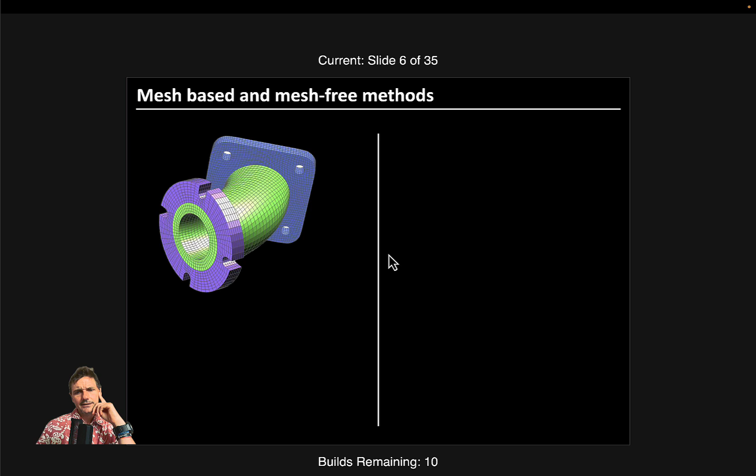So now, what are mesh-based and mesh-free methods? Of course here we're talking very briefly. Mesh-based, we have a mesh, obviously, by definition.

However, it's not so easy in the literature, and that's why we wrote this paper in 2008 with Phu, to try to make things clear, because the literature, when I was doing my postdoc on mesh-free methods, was very unclear, and that's how I really figured out how things worked and what was really important. By writing this paper, it was extremely helpful. Also, something for young academics - if you ever find a topic which you don't understand, the best thing to do is write a paper about it, because once you've written the paper, you will for sure be really knowledgeable about it. If you do it properly and try to make everything crystal clear to the reader, as we did in this 2008 paper, which is now cited over 1,000 times, I think you will see this is highly helpful.

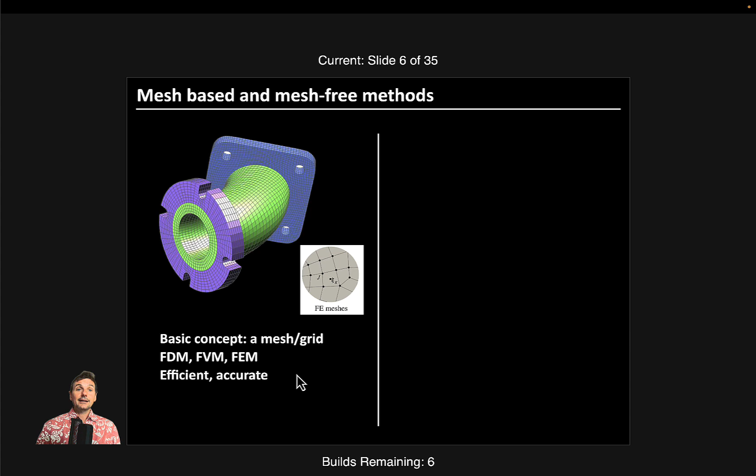But it has some problems which are related to mesh distortion. If you really take this element that you see here and squish it completely to make it a line with all 4 nodes aligned, the transformation between this element and the parent element will become ill-posed. So you will get a negative Jacobian, which will create huge problems because you will get negative terms in the stiffness matrix, and this is not something you like on the diagonal, of course, because you want a positive definite stiffness matrix.

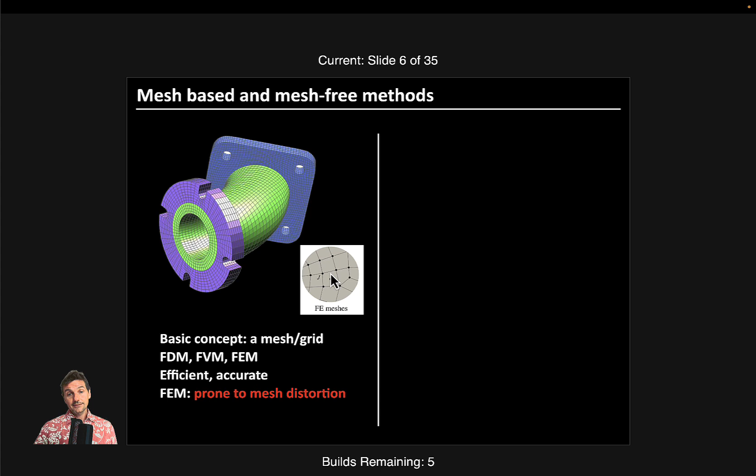So that would not be nice, and there are many ways to go around that. For example, strain smoothing stabilization - this is something that, if you are interested, I can talk about. Or mesh-free methods, which are less sensitive to distortion of the mesh. I say less sensitive because my own experience of moving least squares, element-free Galerkin, for example, is that it is quite sensitive, actually, to point placement. And this is also what we see in finite difference methods, where if we have suboptimal point placement, things go quite bad, I have to say. Meaning that we can get results that are completely wrong, or at least not convergent.

So in mesh-free methods, you have points or particles. Examples: EFG, as I said, SPH, which is the first one, PFEM, MPM - material point method, and so on. In that case, the goal is that you are not subject to mesh distortion. Again, this is not so true for EFG, for example, or any method based on moving least squares - my experience is that it is quite sensitive to distortion. And the other problem is that the geometry is not necessarily very accurate because we have only points and we don't know what happens between the points. So we cannot get very detailed cases.

Okay, so now what is the material point method? First of all, you have to know about Sulsky because she is the one who came up with the idea. So you can, of course, take a look at what she wrote, and you can also take a look at our latest book - I'll give you a reference. And if you can get it, I think it will be useful reading.

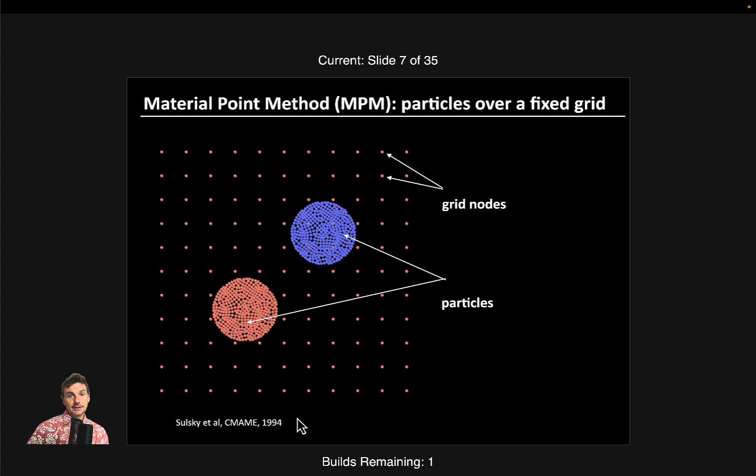Okay, so you have grid nodes, which are here, and you have particles. These particles are superimposed onto the grid nodes. So this is something like a mixture between finite elements and particle methods or mesh-free methods. Why? Because you have the structure of a mesh, which you will see is used to exchange information between particles, and you have the flexibility of having these particles present in the domain. So you have both, and that is something which is highly desirable.

Okay, so now what is included in the particles? You have the position, the volume, the momenta, the stress, the temperature. So all the field variables basically are stored. This is what you are interested in.

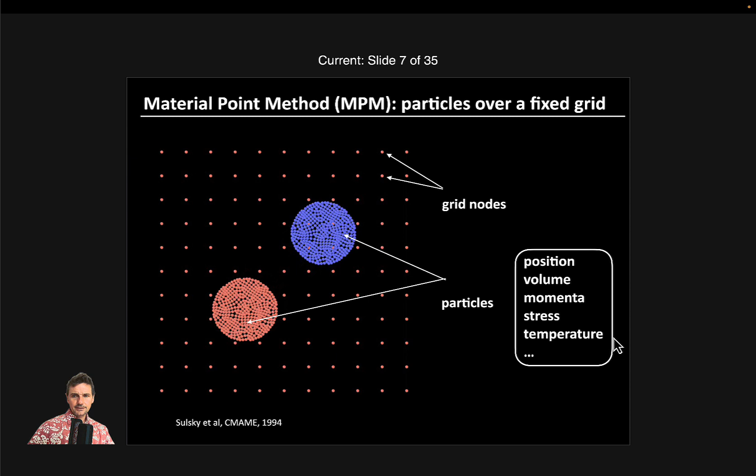So there are, of course, many variants of the material point method, as you can imagine. And the idea is the following. You start with a set of nodes, which are regularly distributed, and you have a set of particles, which are

randomly or irregularly distributed, and you exchange information through the nodes. So the nodes that are here, fixed, will have some way of learning from the particles what the values should be, of course, by interpolation or extrapolation.

So that's point to grid. All right, so now if we have some sort of distortion of the mesh, then we can recompute the values at the grid, and we can update the grid.

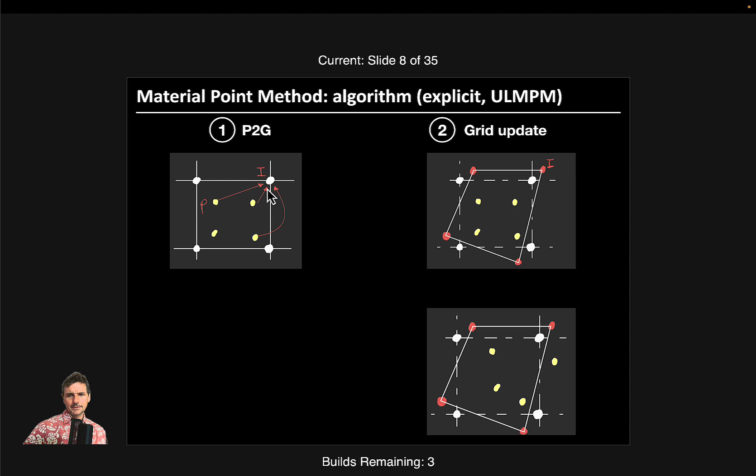And then what happens is that the particles move around, and we need now to go from the grid to the particles, right? Because you see very clearly here that now we have a new grid, right, which moved around

thanks to the knowledge of the variables known at the points level. So we have the points, particles to grid. Now we have the data here, we can move the grid.

Okay, now that we have the grid, we can project back to the particles, grid to particles, and the particles can then move forward, and we reset the grid back to its original position, and we keep going.

So the grid is basically there to help pass information in a more stable way from particles to particles. So it's like an approximation scheme.

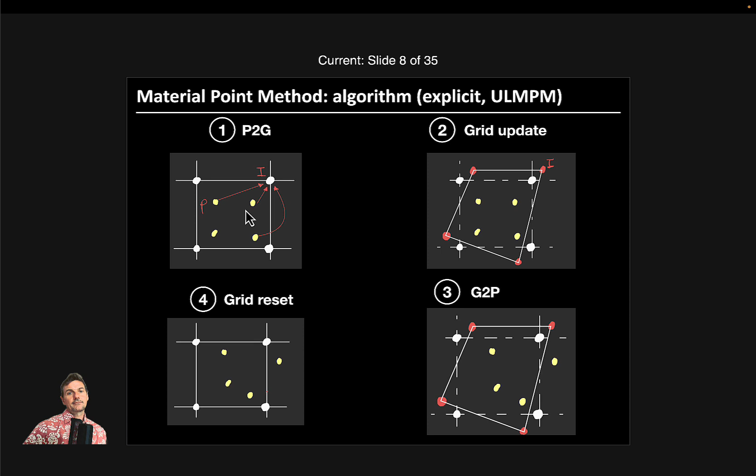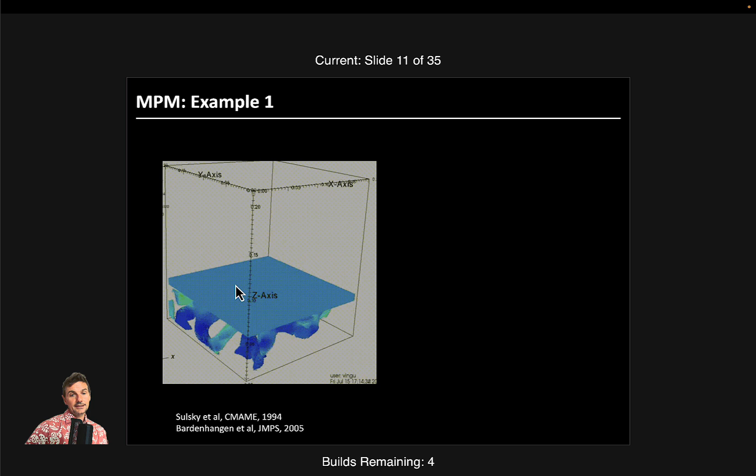There is a self-contact here at the interfaces. These problems are really difficult to solve. This is not something that you do with finite elements in any simple way. But you see here that the problem is solved fast, let's say, and accurately. And this is done by image-based analysis with huge deformations, really enormous, with self-contact.

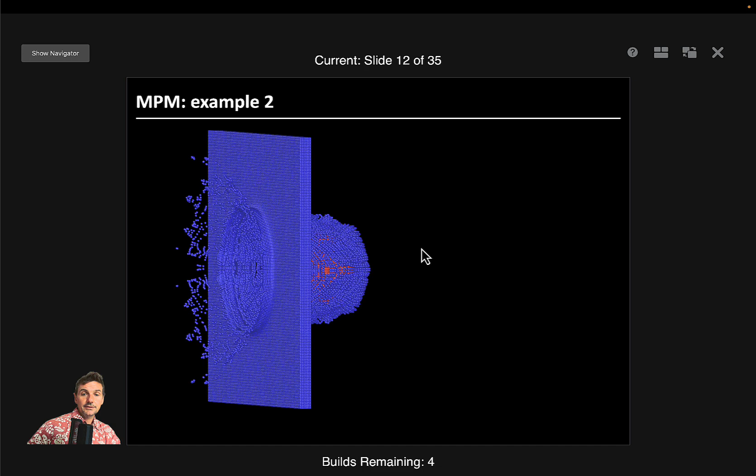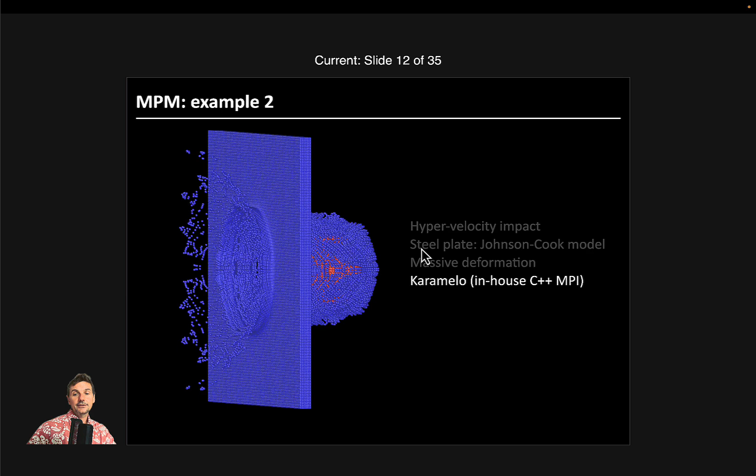Then explosions, and fragmentation is something that you can do. So this is very nice. This is called hypervelocity impact with Johnson-Cook model. Really huge simulations with Karamelo.

There is no mesh generation, very simple basis functions, very large deformations, automatic no-slip contact, also multiple contacts can be done, and simple boundary condition treatment, simple implementation.

So, but there are some issues which I don't know if we'll have time to talk about today, but at least I will talk about the issues, but not about how to resolve them, because we have 11 minutes left, I think. So it would be better to have some questions and discussion.

So what are the issues? And they are very similar to what I was talking about in SPH at the beginning. So if you look at these two annula that are colliding, so what is that?

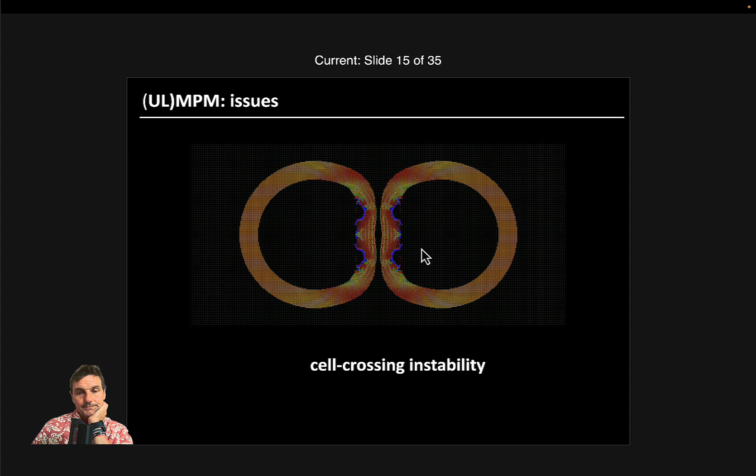Clearly that's not something that you want, because this is not a structural effect at all, so we'd like to get rid of this. And this is called cell crossing instability.

So this is known as numerical fracture, and this is very, very well known in SPH because it was known as tensile instabilities.

And well, I think I will not go into these details now, because otherwise it would probably take another half hour, and we don't have this half hour now.

I think I would rather go back to you and ask if you have maybe questions, which would be really nice. And then, yeah, I'm looking forward to hearing ideas about what we could talk about next time as well.